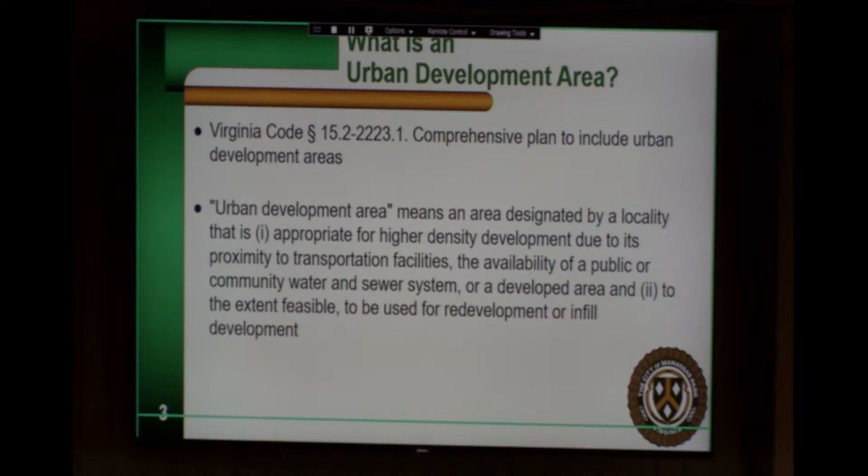What is an urban development area? The Code of Virginia, that code section 15.2, states that a comprehensive plan may include urban development areas. An urban development area per the state code is defined as an area designated by a locality that is, one, appropriate for higher density development due to its proximity to transportation facilities, the availability of public or community water and sewer system, or developed area, and two, to the extent feasible, to be used for redevelopment or infill development.

Any locality in the Commonwealth can incorporate a UDA in its comprehensive plan. It is not mandatory, it's optional. The boundaries must be identified in the comprehensive plan as well as on the future land use map. If adopted, it is required that the city move to re-examine the boundaries every 5 years and revise them as needed. It's also required that, if adopted, principles of traditional neighborhood design are incorporated in any urban development area, such as pedestrian-friendly road design, mixed-use development, and connectivity of road and pedestrian networks.

In Chapter 11 of the Comprehensive Plan, Land Use and Urban Design, this classifies all properties in different land use categories across the city. It also identifies the desired future land use of the city. The categories of land use within Manassas Park include commercial, recreation, public and utilities, private institution, single and multifamily residential. The future land use map is really the map for the next 20 years, and it shows the locations of these designations across the city.

There are 3 redevelopment districts within the city: the Connor Center District, the City Center Redevelopment District, and Four Corners. As you know, the chapter concludes with goals, objectives, and action strategies.

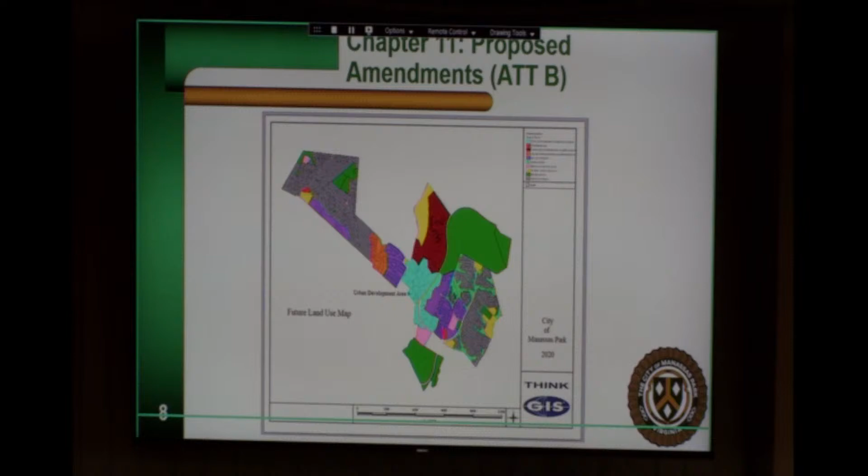Here you see the future land use map, the entirety of Manassas Park. As stated, different colors represent different land use designations. The light blue in the immediate center of the map depicts the City Center Redevelopment District. As you can see, we did not actually recreate the map. We added a text box indicating that that blue area would also be designated as an urban development area. And that was attachment B of your packet.

Attachment C of your packet also adds a text box to the inlay map of the City Center Redevelopment District, beneath it indicating urban development area, and this would meet the needs of the state code.

Also being proposed as amendments this evening, we have the Transportation and Mobility Chapter, Chapter 12 of the Comp Plan. This chapter looks at existing transportation alternatives and systems within the city, both from a motorized and non-motorized perspective. Various sections include streets and highways, multimodal solutions, and a small area focus, again concluding with goals, objectives, and action strategies.

The proposed amendments to the Transportation and Mobility Chapter, this is attachment D, page 10 of the chapter. This is the text: In addition, the city's designation of the City Center Redevelopment District as an urban development area will allow for increased opportunities to promote transportation-efficient land use and land development patterns to help reduce the impact of growth on the transportation network. The UDA encourages walkable, bikeable, and mixed-use places to attract development and spur local economic growth.

Again, attachment D, 3 new action strategies we're proposing in the Transportation and Mobility Chapter. Action strategy T1.3.4: seek funding from the Virginia Office of Intermodal Planning and Investment, OIPI, their Growth and Accessibility Planning Technical Assistance Program, to conduct multimodal planning within existing or planned UDAs or growth areas. Action strategy

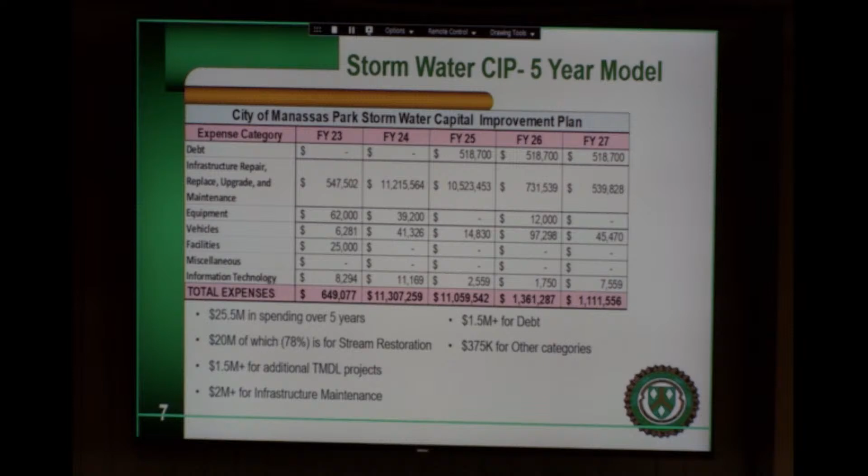We're hoping to figure out ways to conduct the stream restoration at a much lower cost. Again, we are in talks with vendors, and there may be a change coming for that stream restoration project in terms of location and cost as well. But until we get that, I really don't want to talk about it without being 100% certain. But we are hoping to bring that number down.

And that's what we're going to go over tonight, so you can kind of get a project by project overview. But again, if you look at last year's and you see a $13 million increase, it's all from transportation, and you'll see that when we go over the transportation items. And a lot of those are kind of aggressive planning projects that we're going to assume we get grant funding for, and if we don't get grant funding for it, unfortunately we can't do it, but we want to be pretty aggressive in forecasting that out.

Good. Okay, so now we'll go into the projects by detail. We'll start kind of with overhead for the city, administration, IT, and general services. We'll quickly move to the registrar. There's no updates from last year, so we can pretty much move on very quickly from that slide, and then we'll turn it over to schools to start briefing the departmental section.

So starting it off with admin and IT, I will turn it over to Chris, if you can hear us.

All right, thank you. So just to also kind of iterate a little bit what Laszlo previously talked about, a lot of our initial plan was to bake in the ERP, and a lot of that has been itemized out and moved over to ARPA funding. So what that does is create a leftover list of functionalities that we're looking at in terms of addressing needs for streamlining administrative processes in the city, but also note that some of these functions could also move into the future ERP. It's just we're not 100% certain whether that will be included in the new ERP. So we're leaving it here as kind of a plan B if it's not part of that overall solution.

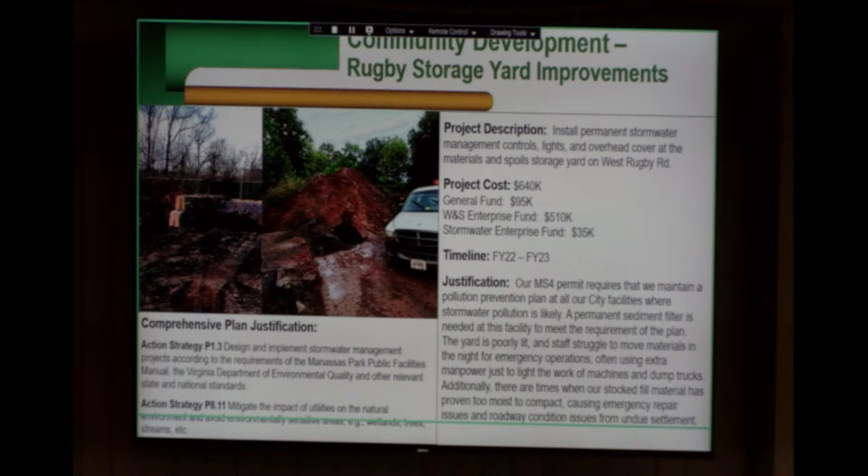When they were spraying down the roof, no water was coming in. As soon as they moved up to the parapet walls and the exterior walls, water started coming in a visible manner. So we're waiting on that final report to put forth recommendations, but we're keeping $150,000 in as a placeholder. We do know that one portion of those leak repairs is going to be replacement and reflashing of the top parapet wall where there's precast concrete. In line with our suspicions, it's not per the detail in the plan, and it's clear that water's been infiltrating through that parapet wall for some time.

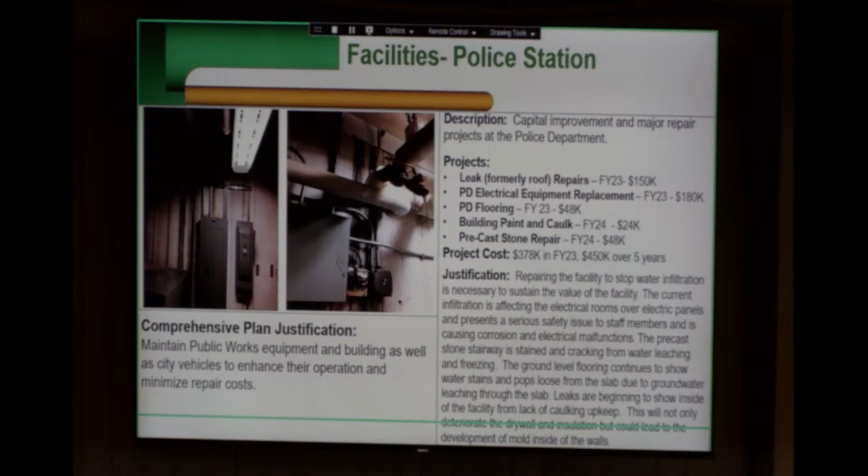Here's some images of some of the water infiltration. You see that black stain on the walls behind some of the piping. Here is some of the precast stone that's a mixture of cast-in-place stone and precast stone. You can see how it's become damaged, with rust spots forming around the handrails, and in some places rust spots in the middle of the precast stone.

Here's an example of the flooring, where it clearly has signs of moisture and the tiles popping up. This next project is the same basic layout - facilities at the fire station. The slide is laid out a little differently.

There were 4 more projects, so we put them on a second slide. I'll capture the highlights of this slide, and we'll move on to the itemized projects. Altogether, project cost for FY23 is $55.3 thousand,

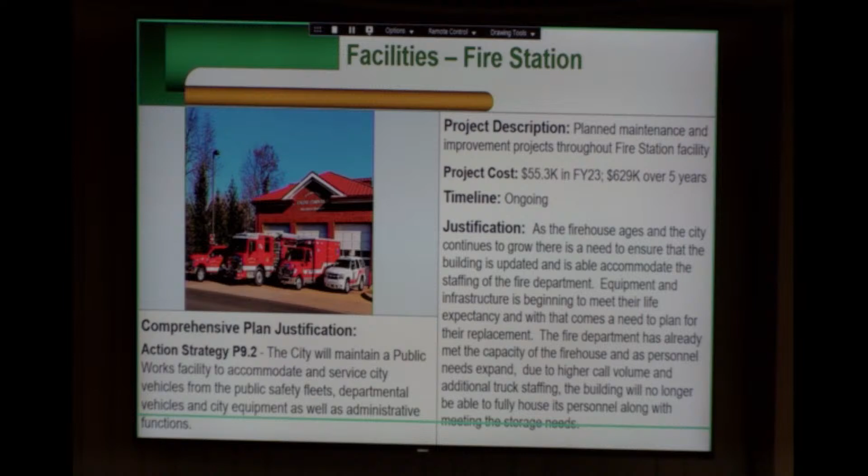$629,000 over 5 years. The projects include interior painting. We are going to attempt to move interior painting to an operational line where we do a substantial amount of painting each year, but stay below the $5,000 CIP threshold, so that regular painting of these facilities doesn't lead to massive projects like this.

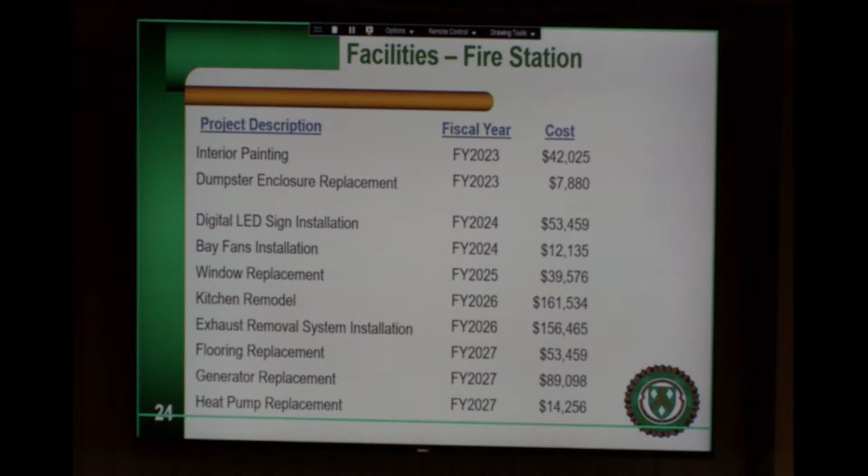Facilities, the building automation system, this has been an ongoing project. We've been trying to get rid of proprietary software that controls HVAC systems in our buildings. That's been a real focus of the facilities manager since he came on board. When we have the new city hall up, that would be the final step in this project, so the facilities manager can see what's going on at all buildings from a single laptop as long as he's logged into the network. This system can tie into not only HVAC but also security controls and any intelligent lighting systems, so those things can be monitored remotely as well, all from one comprehensive system. The total project cost is $125,000, and we're scheduling it at FY '25 after the occupation of the new city hall building.

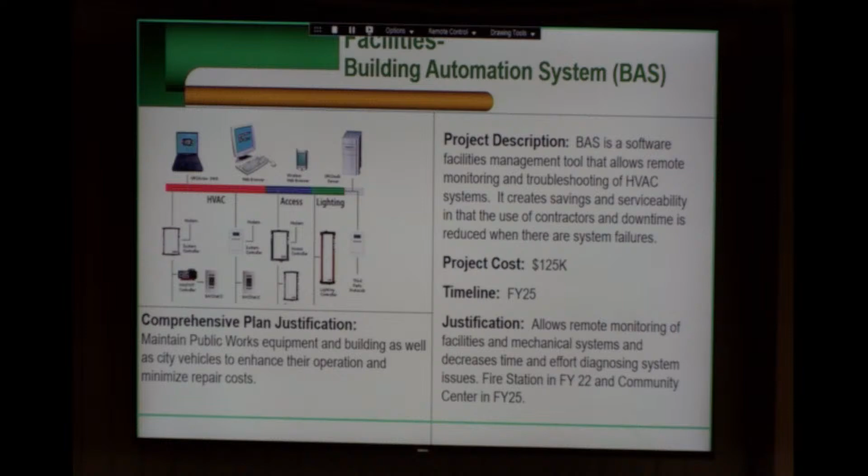Public parking lots. This deals with both the surfacing of the lots and the lighting of the lots. We have a rough estimate based on our internal city engineers' estimates of paving costs. We've tried to do the resurfacing at an average of $100,000 a year. This is comprehensive to all city-owned facilities, so your parks, Signal Hill Park, Blooms Park, we'll look at as that pavement ages, but also your community center, your PD, your fire department, city hall, Public Works. Fortunately, City Hall and Public Works, we're trying to replace those facilities as we speak, so those are not priorities right now.

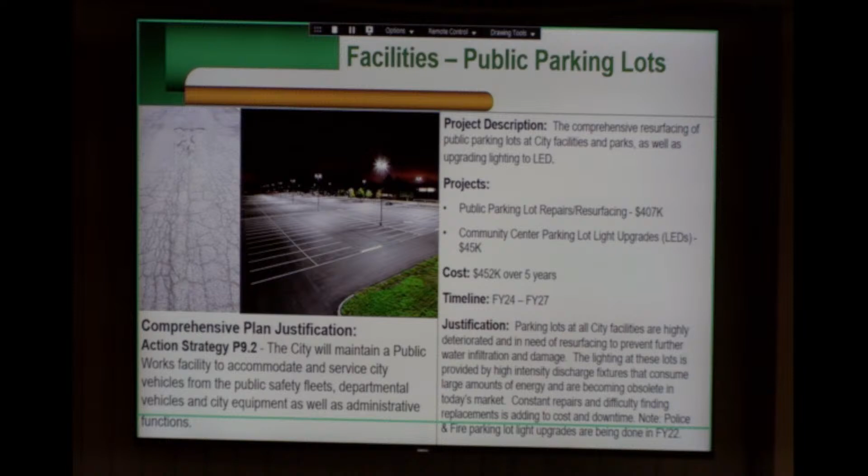And the LED lighting upgrades, we've actually made good progress towards upgrading a lot of the parking lot lighting at the police station. We're going to try to finish up the fire station this year as well, but upgrading the community center is a very large project, and that's $45,000. Total cost for all of this resurfacing, again trying to stick to $100,000 a year in lot resurfacing activities, is $452,000 over 5 years. And I know the timeline only goes out to '27, but understandably parking lot resurfacing will not end in '27. This will be beyond this CIP. Right now, this is based on city engineers' estimates, what we think a decent plan of resurfacing looks like.

For the actual resurfacing operations at Costello Park, there's some areas that are in really bad shape, and we don't want to wind up losing any base. That's a relatively new parking lot, and we want to try to get that resurfaced and stop water infiltration while we can. There's also some sidewalks around that facility that are in dire need of repair, and then moving on to the primary lot of the community center at Costello Park.

As far as the parking lot upgrades, again, police and fire, we hope to have those completed in FY '22, and then we'll move on to the community center in FY '24. And Public Works, we had it in there, but if we're in a new facility, we'll have to reevaluate when we move.

Excellent, thank you Calvin. And in terms of the previous slide, for the fire station parking lot, that's being handled under the ARPA funding, so their facility qualified for ARPA funding for improvements because they're technically a medical facility as well. So we didn't leave the fire department out of this project in terms of repairs and resurfacing.

For this project, New City Hall, New Community Development, this will stick around probably for the next few years on the slide deck, and hopefully we'll be done with it. But what this entails is two major projects. Number one, the City Hall, as you can see across the street, that's currently under construction, should be done this summer, and we'll move over to New City Hall and tear down this building.

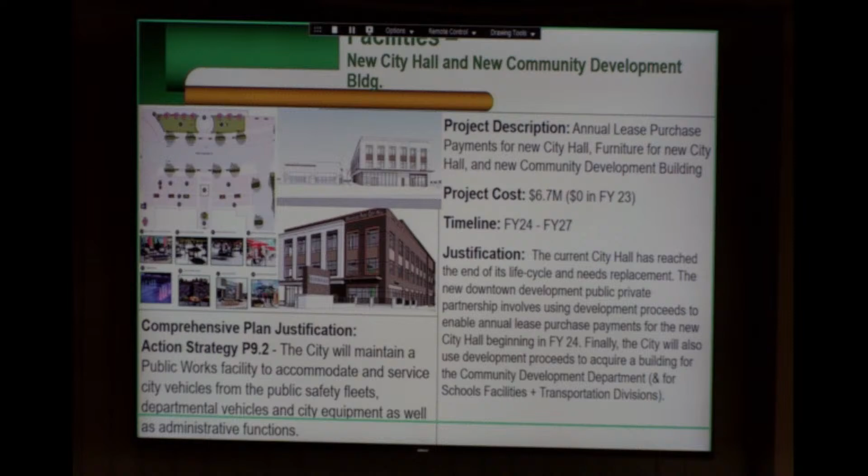The next project is the security system replacement and upgrade project. This was approved via the governing body via contract back in September, so there's already contracted work, but again, more for informational purposes since it's scheduled out for the next few years. The payments for this will have begun in FY22, and we make annual payments of $305,000 each year for the next 3 years, so 22, 23, and 24. The majority of the work should get done by 2022, but we entered into a finance agreement to be able to pay for it across those 3 years and not impact our current FY22 budget.

So what this project entails is whenever you come in, if you guys use your ID cards to swipe in, that's a security system we have. The vendor who is doing that was coming back with a lot of higher prices, and all these were getting very old. It was time to replace them anyways across our facilities. The fire station didn't even have any card reader access right now. Everything was a combination, so it was very old. Our new city hall needed those, so we're replacing all of them across the city with a more modern solution.

We're installing security cameras. Most of our facilities don't have any security cameras, and the ones at the police station are getting older. We have to upgrade them with new security cameras, safe alarm systems for our treasurer, panic buttons for our employees who are dealing with customers, with all the active shooter incidences occurring across the country. We want to equip our staff with the ability to notify police immediately. So that's what this project entails. It's already been approved, but we keep presenting it for appropriations and budget planning reasons, and the project is not done yet, so I want to keep this on your radar.

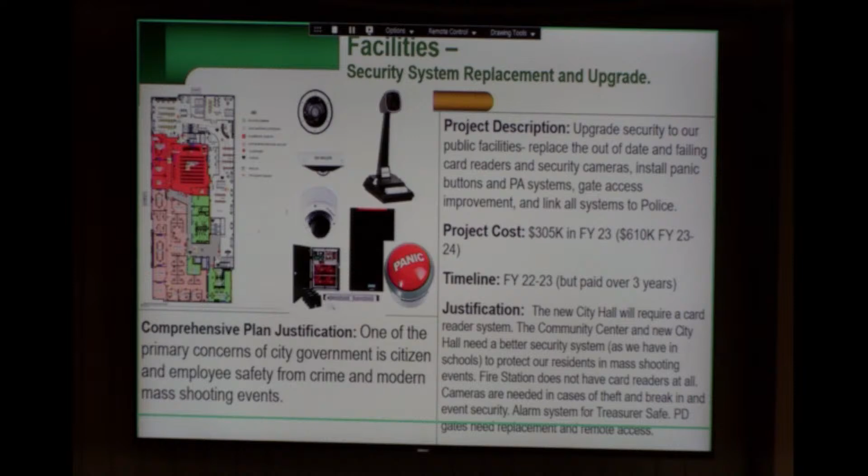And next we'll move to our fleet replacement program, so I will turn it over back to Chris.

All right, we'll start with the 10-year plan, because this is part of a much broader plan and 10-year ongoing strategy for the city. Just to quickly review, this was the FY21 phase decision to move to an enterprise lease model for the city in terms of replacement vehicles, that we really only started due to delaying things for the COVID pause. FY22 was the first year we really started replacing the bulk majority of our vehicles, which we're doing right now as a city. So this is just the continued plan to execute.

I just wanted to note a few caveats. Obviously people have brought up the understanding that logistics and supply chains have been a bit bottlenecked. We still have a really solid agreement with Enterprise to find and procure government rate vehicles, so we haven't really seen any increase in pricing from the original forecast, but there has been some slight uptick in the public safety upfitting material costs. All of those components go into mostly police and fire rescue vehicles. So we did see a little bit of that, but that's on the upfit side, not necessarily with Enterprise, though we do bake that material component into the lease price.

Also of note, the value of used vehicles is also going up. So the net fallout is still kind of a break-even in terms of the offsetting cost there, just because the equity value of our current vehicles that we're selling back to Enterprise is also going up, because used vehicles are more valuable due to the lack of brand new vehicles and the cost of them going up. So we still compared it to the old model prior to the Enterprise program, and we're still at a net savings of just over $900,000. So, next slide.

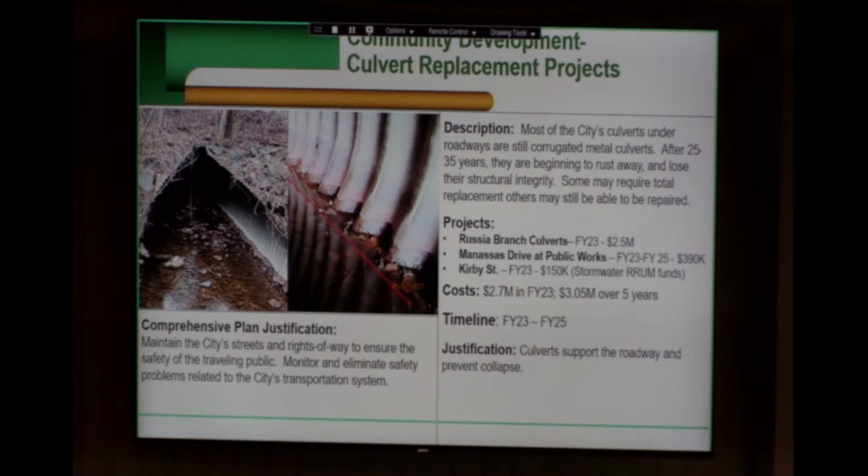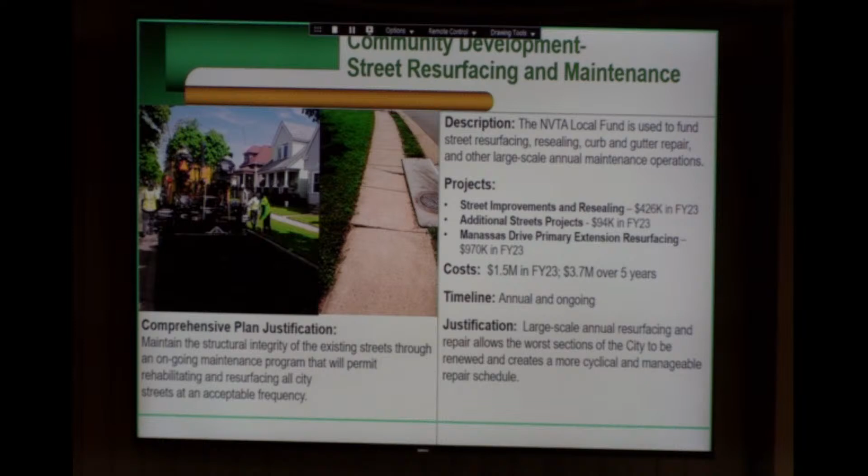So every 5 years, Steve, we have an opportunity to apply for this grant, so it is somewhat ongoing. Total cost for all of these resurfacing and maintenance operations is $1.5 million in FY '23, $3.7 million over 5 years.

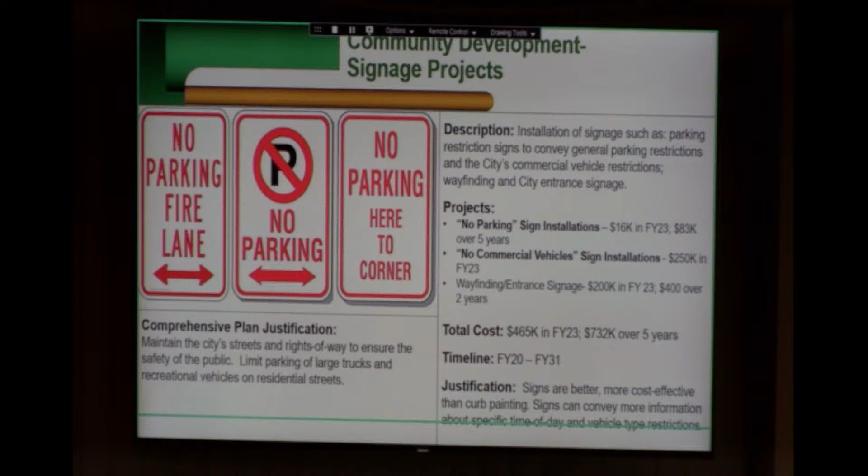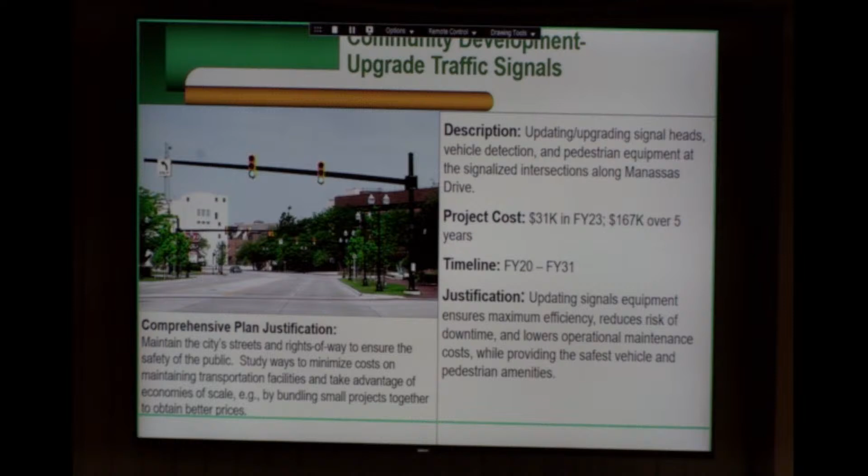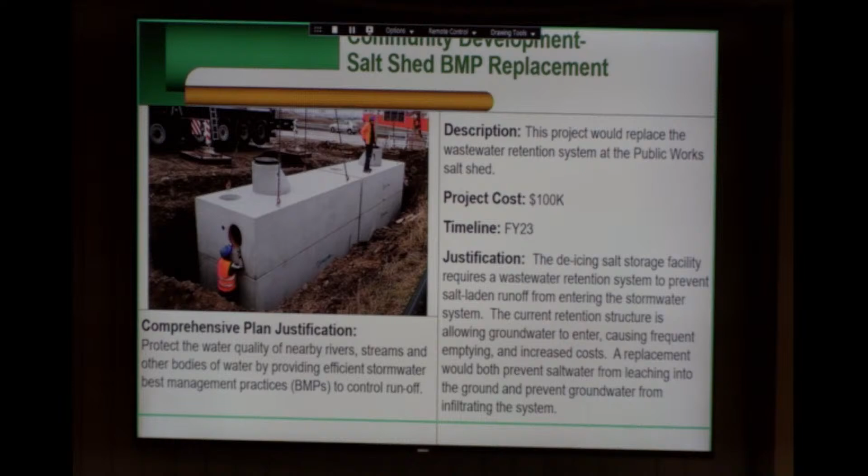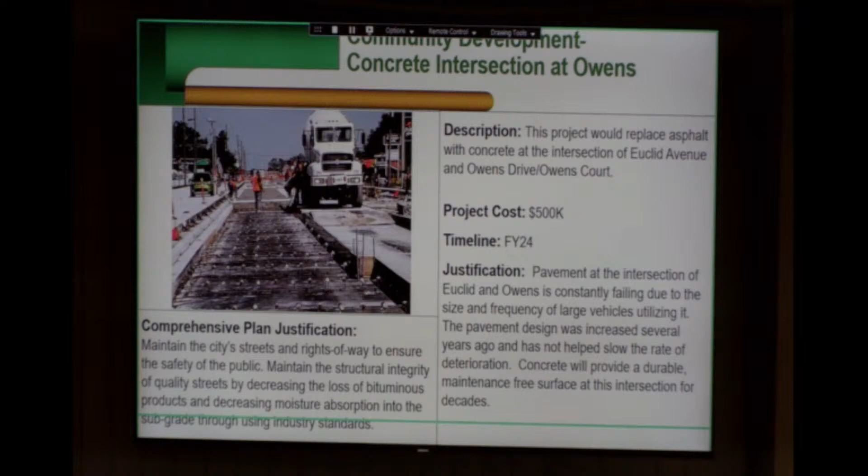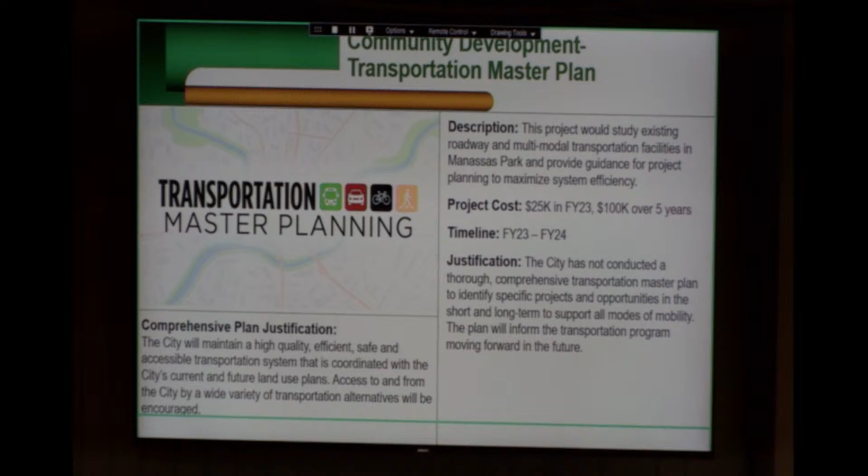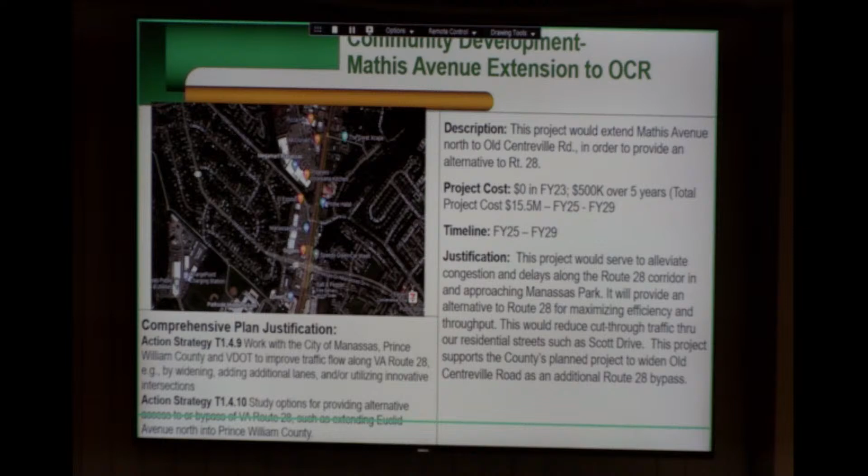So you're really restricting side street traffic coming onto 28, the way they come onto 28, to leave more open signal time for the northern movement.

It's a major safety project, which is what we learned from the STARS study that VDOT conducted. You have a lot of accidents on Route 28 when people are turning in and out of all these various shopping centers and driveway entrances. These R-cut, L-cut, and median U-turn intersections help cure some of that, and they also improve travel time.

down the corridor. We're looking to add aspects to the project that will help it score higher in Smart Scale — anything that involves multimodal transportation, bus depot, park and ride lots, things like that. Any of those things improve how this scores in Smart Scale, but we're going to continue to pursue funding for this project. We know that this is far out.

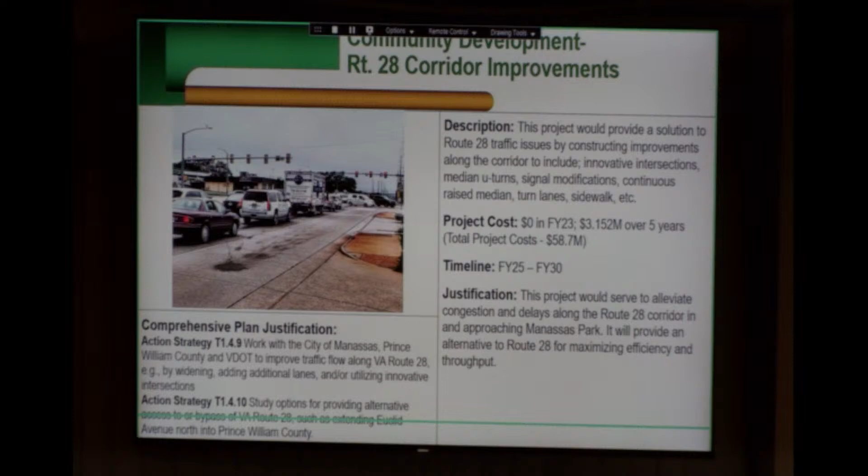reconnect — I understand that at one time a gravel road did actually connect Euclid Avenue to Route 28, but ever since the residential subdivision was built, that road has been blocked at the edge of the subdivision. This would fully pave and provide parking on both sides of Conner Drive through that area, allowing better access from Route 28 into our downtown and from downtown to Route 28.

This will also help serve the businesses between Conner Drive and Manassas Drive, because if any of you have tried to go to the U-Haul or the gas station on the corner, you don't have a lot of choices — you either make a U-turn somewhere down on 28, or drive all the way down to Liberia and come back. So those businesses should benefit from this project, and especially the residents of this subdivision will have much better access to the businesses right there on the corner.

But this project is $2.7 million in total, with $2.3 million in FY22 through 23, and we do anticipate it will be completed with construction hopefully this fall.

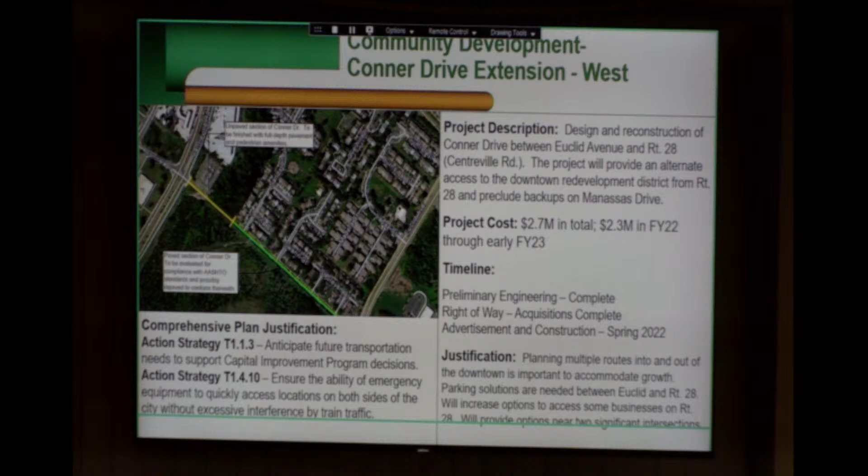Conner Drive Extension South. This one is probably new to everyone here, but we have seen iterations of this when we were looking to relocate the parking garage, the BRE parking garage, from the base tract. We had several developers come in with certain proposals. I believe one of those proposals that was shown to the Planning Commission and the governing body had a bridge or tunnel extending Conner Drive to the lot in front of the Elms.

Right now, when the railroad arms come down - Norfolk Southern says there's no problem, but we all know there's a problem - traffic backs up, and it can take 45 minutes for me to get home to Blooms, because you've got to go to Liberia. Well, our emergency responders have to go through the same thing. So a second way to traverse the tracks that is not an at-grade crossing subject to railroad arms, or God forbid, some sort of major catastrophe on the tracks. If our emergency access vehicles had a bridge or tunnel they could go under or over the tracks, that would definitely improve our safety here in the city.

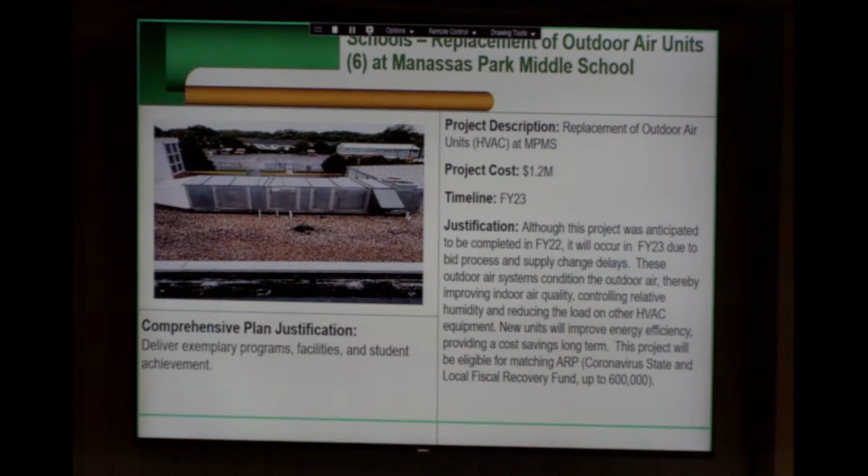So, Chief Lugo, are you on? Yes, sir. Can you hear me? Yes. Thanks. Good evening, everyone.

That made it kind of hard for our dispatchers to do their job. But this vehicle will also provide the city public safety and any city operations the ability to use it for any disaster, criminal matter, or fire structure that's going to be a prolonged investigation, or having our people out there for a while. Or any big city events we held here, like National Night Out, 4th of July, any festivals we might do, where this would help keep our city safe during the event. We expect hopefully a timeline for FY25 to 29 on a lease purchase plan.

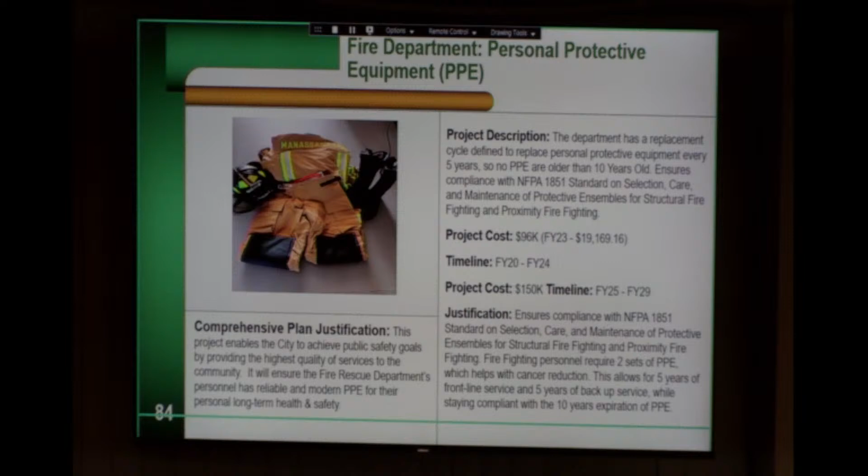Self-contained breathing apparatus is the same, replaced every 10 years for the safety of personnel. The next timeline coming up is fiscal year 25. The units we'll be replacing are from fiscal year 2015.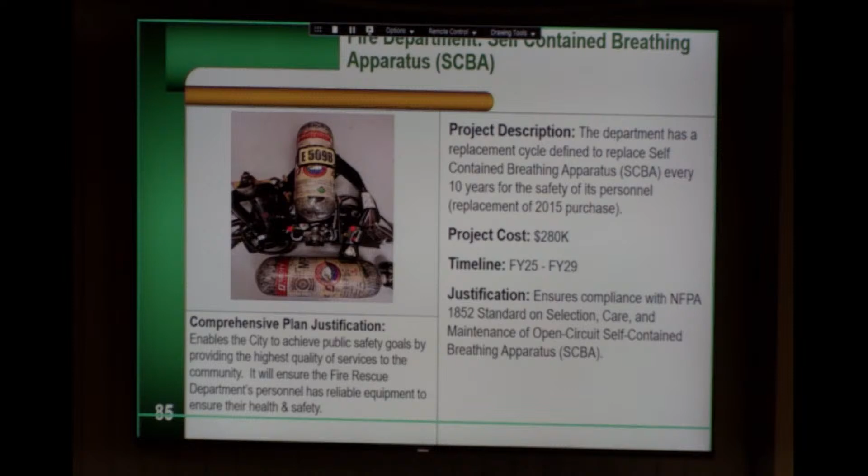And I think that is it. No, okay, one more slide — building renovation, and I'll let Mr. Palco jump in on this as well. He asked me to add this slide in there.

You can see it's fiscal year 31. The justification is that as the firehouse ages and the city works to meet the minimum staffing needs, the building needs to be updated to accommodate the staffing. This is us looking at the building and seeing that we are outgrowing it, or have outgrown it, and there is a need to plan to add bunk room, locker room, and that sort of thing.

With the current footprint on the land we have, there's no way to grow out, so there's more of a plan to grow upward, like a second and third floor. As you can see, the project cost is $10 million. This is just a heads up that this is coming up in fiscal year 31 with such a big number as a plan.

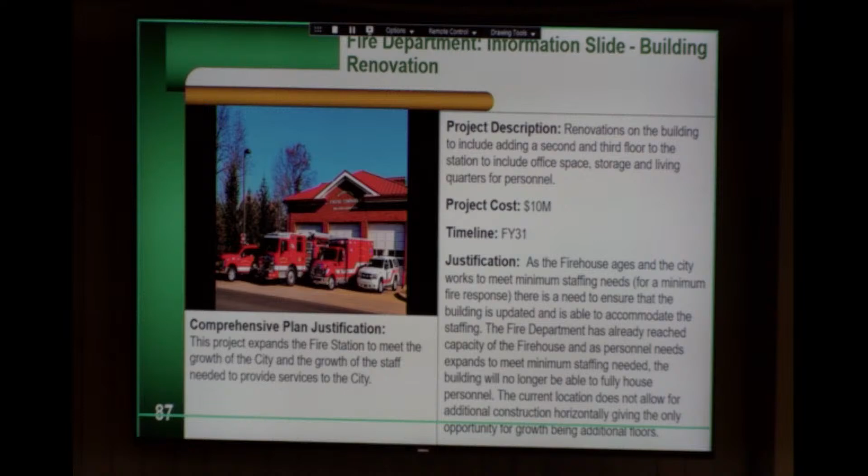Great, thank you. Any questions for Chief Jones? Okay, good. Great, thanks Adam. Okay, Jay? Yes, sir, can you hear me? Yes, sir.

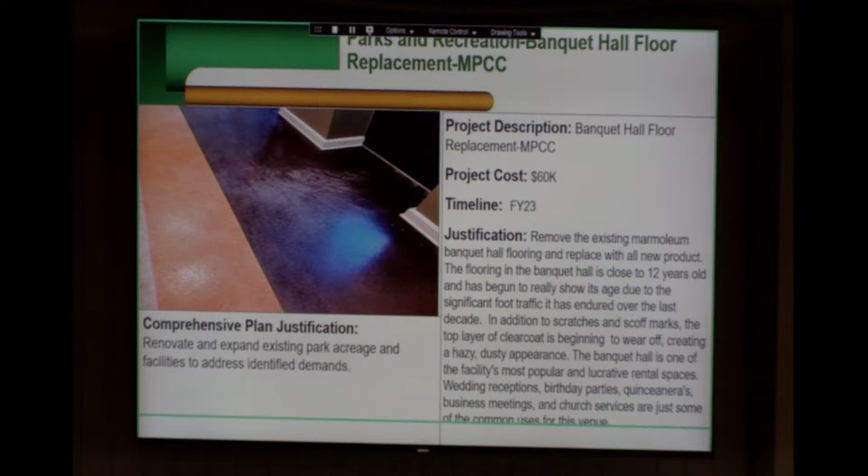So I think these furniture upgrades would enhance our ability to market each of those spaces more effectively.

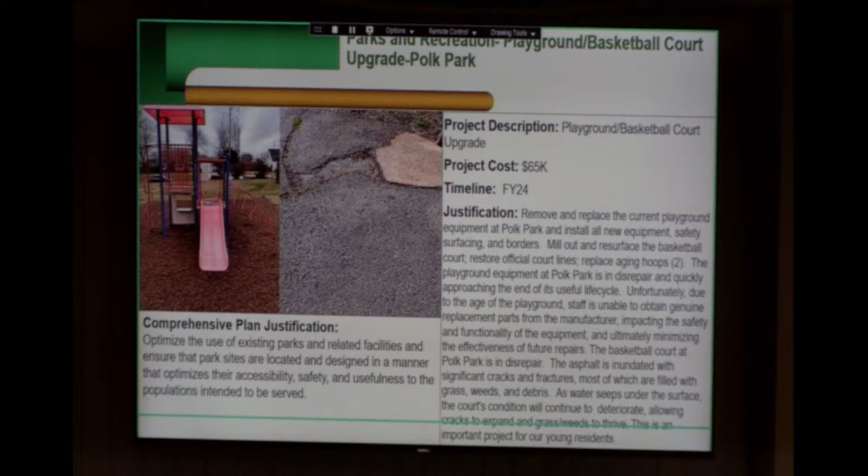This project comes in at $24,000 and is proposed for FY24. The current light bollards that border sections of the walking path around Costello Park, close to the community center, are very worn and distressed and in need of replacement.

4 of the bollards have been capped and removed due to issues we're unable to fix without completely replacing the unit. 6 more are structurally unsound and on the verge of being taken offline. Out of the 21 total, we've got about 10 already that are either offline or about to go offline.

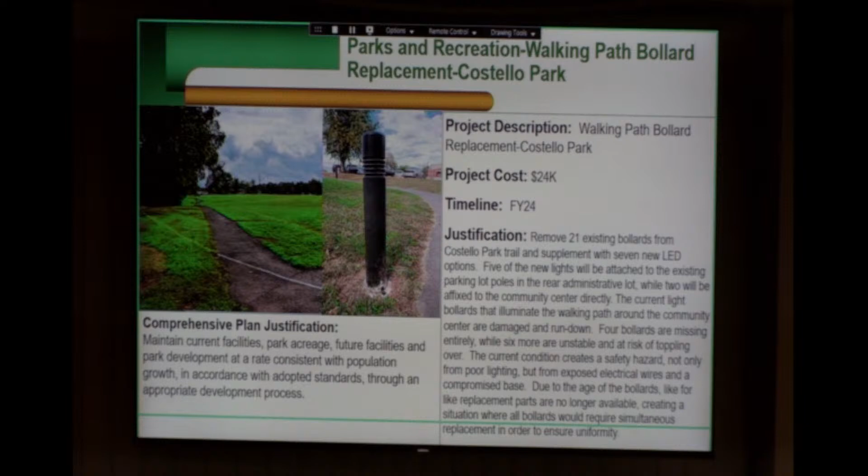Next projects are the perimeter caulk and white coat replacement projects. These come in at $26,000, $28,000, and $73,000 respectively. Those are 2 perimeter caulk projects in 24 and 29, and 1 white coat project in 24. The caulk line surrounding the activity pool and Lazy River needs to be removed and replaced.

This was last done in 2015, but it's recommended to be completed every 2 to 5 years. If this caulk line is compromised, we risk water seeping into the joints, which can ultimately cause beam and concrete damage.

Similarly, the Lazy River white coat will need to be removed and replaced in '24 as well. This was also last done in 2015. This type of work is recommended every 7 to 8 years. Again, along the same lines as the perimeter caulk project, we want to prevent water from reaching the joints.

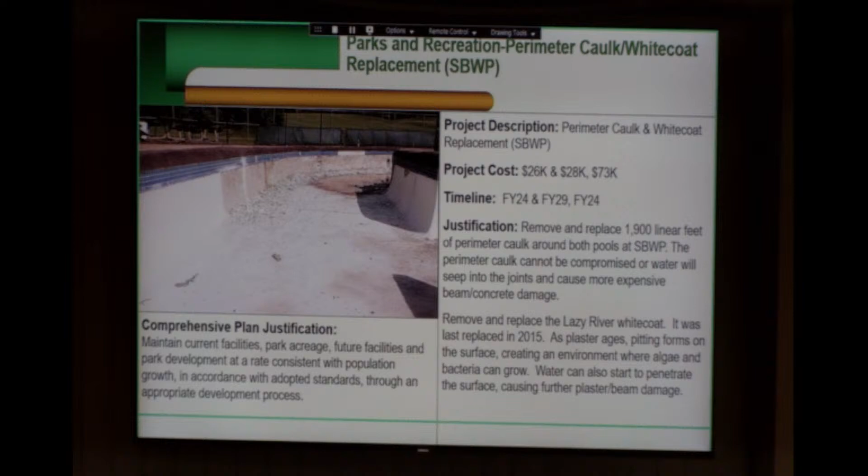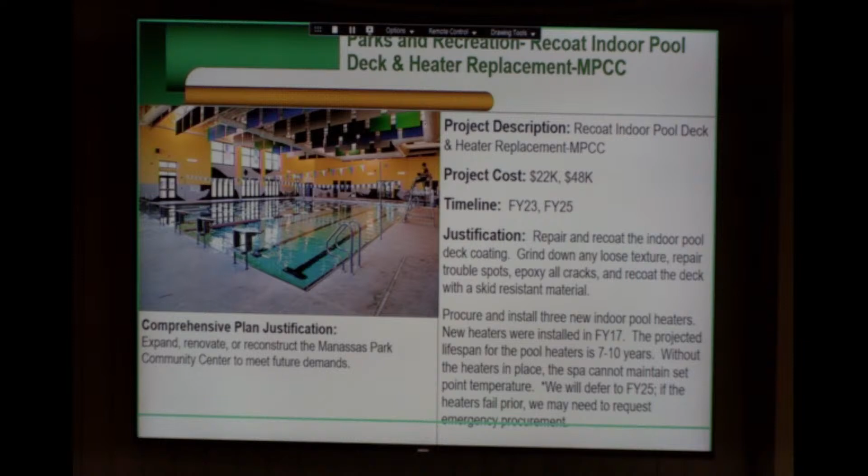Like last year, we mentioned if we're unable to make it to '25, we may request emergency procurement on this particular project. Next up is the outpost, spray cannon, and safety matting replacement projects.

These come in at $375,000, $40,000, and $25,000 respectively, and are proposed for FY25. After 26 years in operation, the outpost is beginning to really degrade and deteriorate. It's one of the water park's most popular and largest activity features, and really serves as the centerpiece of the facility. But after 2 decades of wear and tear and exposure to the elements, full replacement at this point is imminent and necessary.

Water cannons are also in dire need of replacement. We see frequent leaks and a lack of manual control. Essentially, there's a steady stream, whereas they're designed to allow the user to manually control the cannons. That feature no longer exists, and they're even prone to harboring bees' nests due to the antiquated design, which is certainly a safety risk. One of the 4 cannons has actually been permanently taken offline due to a more systemic pipe issue that would require us to demo a large section of the pool deck to fix that particular cannon.

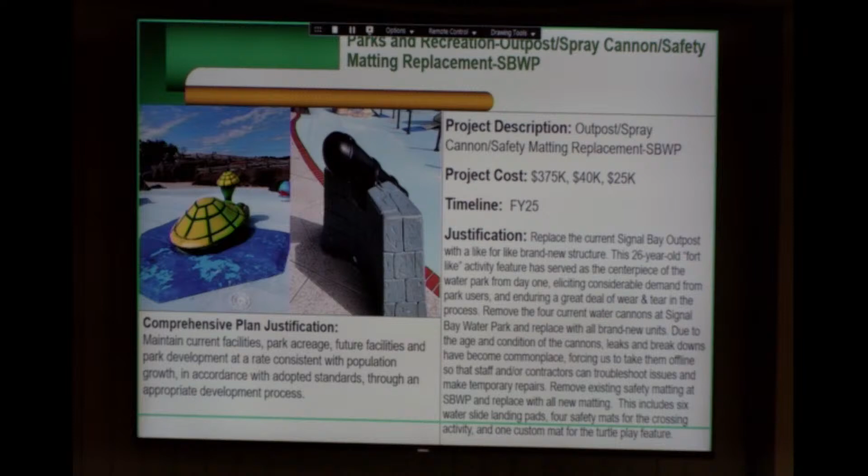Lastly, the safety matting throughout the activity pool needs to be removed and replaced. This includes 6 water slide landing pads, 4 crossing activity mats, and 1 custom mat—11 in total. After 15 years of exposure, the mats are discolored, the paint's chipping, cracks are beginning to form, and they're just in general disrepair.

Next project is the Signal Bay Water Park Bathhouse, Pump Room, and Pool Office Demo and Rebuild. This project comes in at $1.2 million and is proposed for FY25. The bathhouse, pump room, and pool office have really reached the end of their useful lifespan.

The bathhouse is not up to code or ADA compliant. Electrical components are failing. The cinder block walls are cracking. Ventilation is inadequate and unreliable. Oftentimes the roof has leaks. The pump room is outdated and dilapidated. So the current facility will need to be demoed and rebuilt in the current footprint.

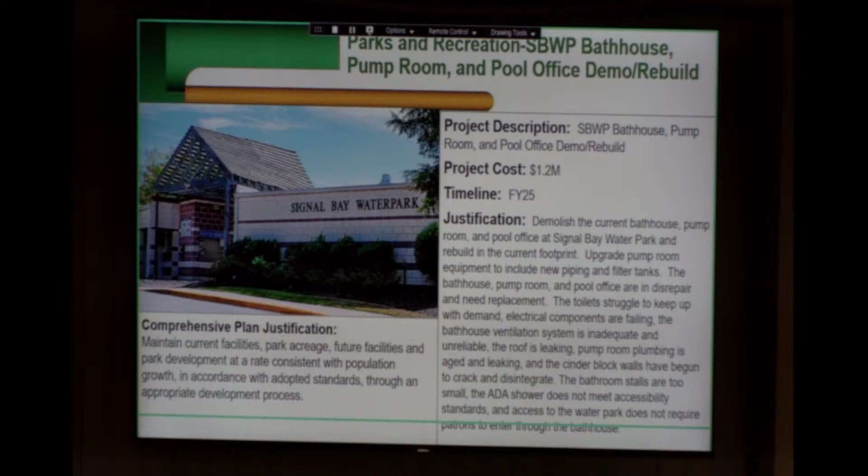Next project is the bus replacement. This comes in at $68,000 and is proposed for FY26. The bus is at the end of its useful life cycle. It's already endured significant repairs over the last 2 years, one of which was a transmission issue. The vehicle is predominantly used to support senior-based services and is our only ADA accessible vehicle in the fleet.

Next project is the zero-turn mower replacement. This project comes in at $14,000 in FY24 and $28,000 in FY25. The Parks Division maintains just under 80 acres of mowable space, so they rely heavily on these zero-turn mowers to manage significant mowing obligations at 6 parks throughout the city. By '24-'25 we're scheduled to hit industry standard for hours of operation on the 2 units, and we're looking to replace 1 unit in '24.

Basically, the unit in 24 was purchased a year prior to the 2 in 25, so that's why we're spacing those out. Next project is the Blooms Park Trail Restoration.

This comes in at $1 million and is proposed for FY26. The current trail at Blooms Park is in disrepair. There are large cracks and fractures throughout the trail. In some places, sections of asphalt are totally displaced and detached. The trail is inherently rugged and provides for a pretty challenging hike. But the frequent changes in grade and the deterioration will only further enhance the risk for trips and falls as we move forward.

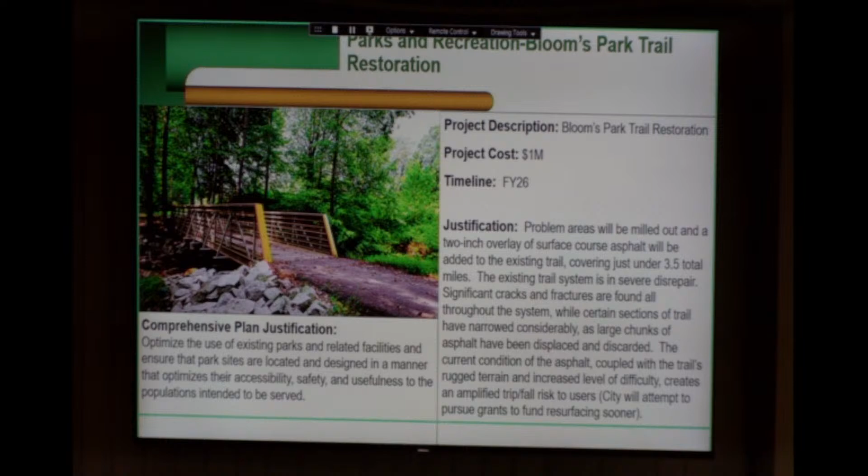In this project, we're looking to mill out and completely resurface approximately 5 miles of trail. Since we've recently expanded the trail system to include several shortcuts, this quote was modified from last year. We came in last year a little over $700,000, but again, that was based off of a little under 3.5 miles of asphalt trail.

Next project, and the final CIP project for Parks and Rec, is the downtown library establishment. This comes in at $425,000 and is proposed for next fiscal year. Over the next year, the library will transition from Blooms Park to a much larger, robust 8,000 square foot space in the city's new downtown. This project encompasses FFE, opening day collection, facility design, and technology costs associated with that move and setup. Basically, a combination of those 4 categories will make up that aggregate $425,000.

This was a 2-year CIP project, back to back, and currently in FY22, $400,000 has been earmarked to also address needs related to this project.

Any questions for Jay? I have a comment - I didn't see anything about skate parks. That's still in our spreadsheet. It's one of those desired projects that we have. It's a very expensive project. That's a real concern for me, so.

I think we'll continue to explore grant opportunities for that, but we understand there is some value to it. We weren't able to fit it in the last few years in our CIP. But I'll keep hammering on it. You guys can certainly push the governing body, and we'll keep it in the spreadsheet to keep awareness of the project - it is there, it is valued.

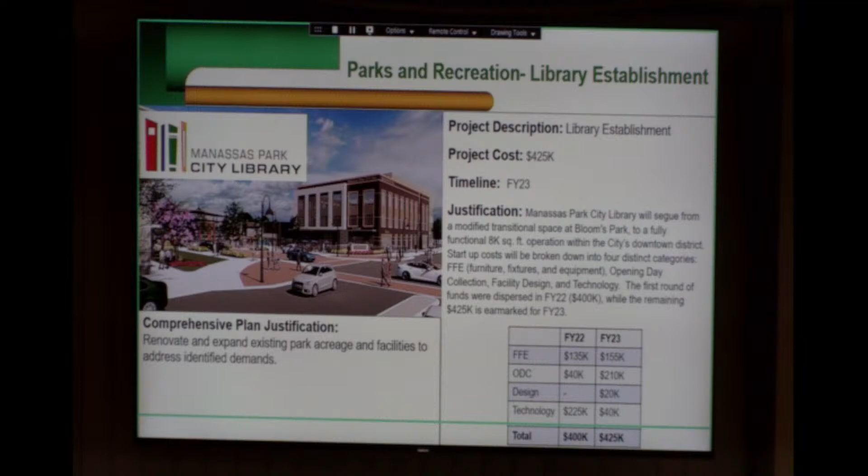We're going to look at the general fund projects, the community development fleet needs that fall outside of the enterprise lease program. Our community development and public works vehicles are ones that can't be obtained by enterprise because of their size or specialty types of equipment, but there's no cost in FY23.

These are very large vehicles, $863,000 over 5 years. One of the biggest expenditures in this category is we have 2 flusher trucks in the city. We are not allowed to use our stormwater flusher truck for sanitary sewer activities, or vice versa, unless there was some sort of sterilization procedure. We looked into that and it wasn't really feasible, so we have had 2 flusher trucks since.

The water sewer flusher truck is by far the oldest. The gun on it for hydro excavation is currently out of service - we broke that on a water break last week. That is why you see $479,000 out of the water sewer enterprise fund compared to $249,000 out of the general fund. Not a typical split for buying equipment, but that's because this large flusher truck is 100% out of water and sewer.

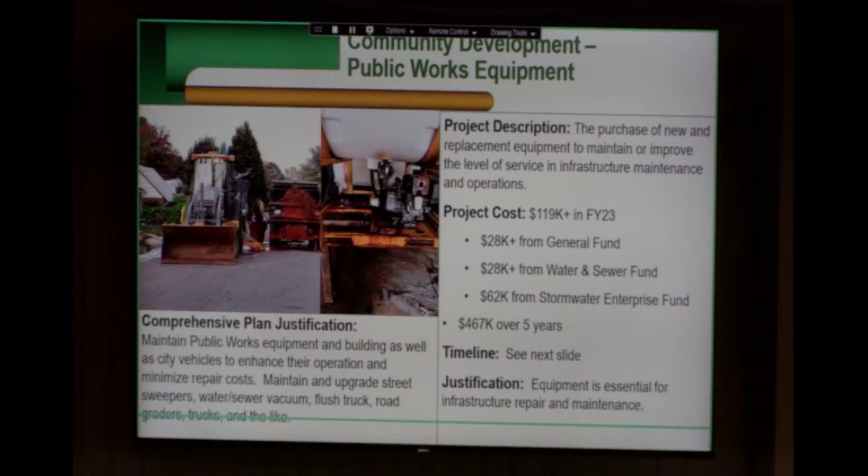The 12-inch chipper is one of those specialty pieces of equipment that is primarily out of the stormwater fund, because we primarily use chippers for pond maintenance, stormwater easement area maintenance, and taking down small to medium-sized trees.

A mini excavator - we have our old backhoe and a new backhoe, but a mini excavator, especially when dealing on private property, maintenance of laterals and things like that, allows us to be less disruptive. It tows easier, is easier to load, allows for less damage, and smaller excavation areas.

So we've never had a mini X in Public Works before, but it's been on our list of needed equipment for about 5-6 years. So we're happy to finally see it coming on board in FY23 at $69,000.

Our rubber tire loader, that's just a direct replacement. Our existing rubber tire loader is aging and we keep having hydraulics issues on it. It's time to replace it.

3 light towers, again, another piece of equipment that we have gotten amazing life out of. I think we decided in a CIP meeting this year that the light towers we have are over 15 years old. We've gotten great life out of them, and we're going to try to extend them to 2026, but both the mechanic and the superintendent are begging me right now to try to advance this schedule, because we're having issues with the motors on the light towers. They're gasoline motors, so they're both a generator and a light tower all in one.

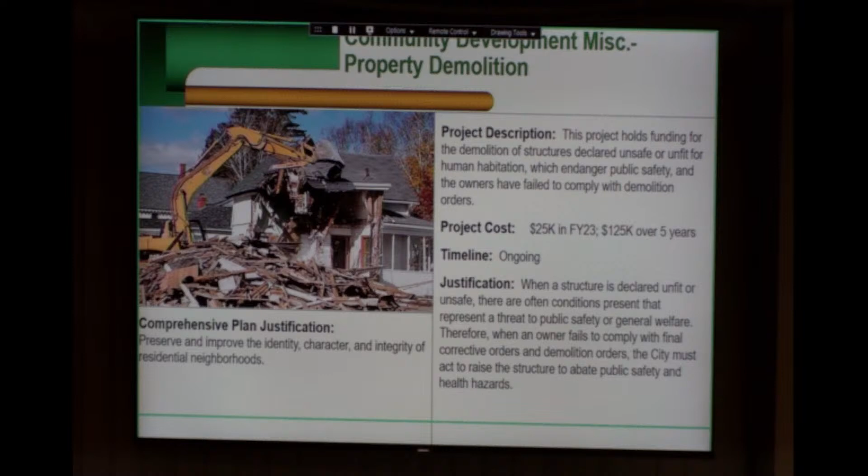If you drive down a hill, you're probably finding a private sewage lift station. Many of the businesses in the Conner Center have private sewage lift stations, which means the owner of the business is responsible for maintaining a sewage pumping system that pumps uphill to a main.

They're not usually familiar with it. We see a lot of properties change hands. We've had some major spills because people see water flowing up out of a pit, and then they put a sump pump down in it and pump. One time they were pumping it right into a storm pond. So we don't feel very comfortable.

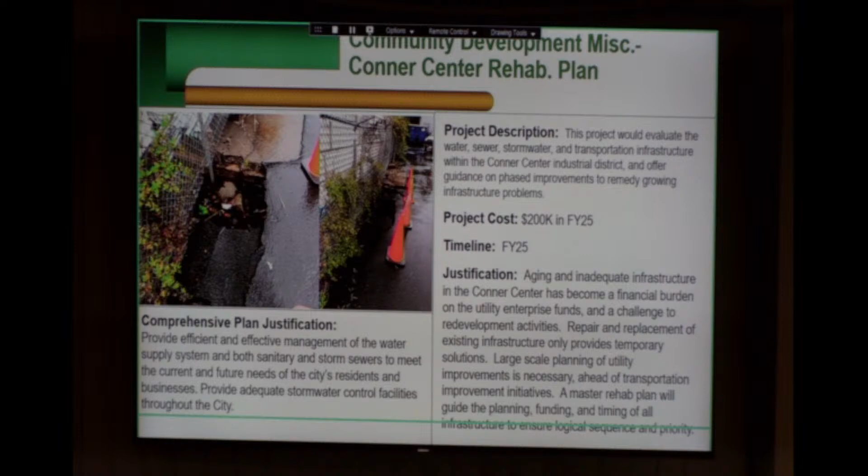$200,000 in FY25. That's our best estimate to get an actual master utility rehabilitation plan for the Conner Center. These are Water Sewer Enterprise Fund projects that are primarily funded out of the Water Sewer Enterprise Fund.

This is the annual ongoing RRUM line: repairs, replacements, upgrades, and maintenance. It's where we carry a very large figure for things such as lift station pump failures, force main ruptures, valve replacements in force mains, things that are going to cost immediately because of the nature of the beast. They're going to cost over $10,000 a pop.

This would cover generator failures at your pump stations and lift stations. This would cover major electrical equipment outages, failures at your pump stations and lift stations, major piping and valve repairs in the streets, especially with our 20-inch mains, large-sized water mains that can cause catastrophic damage if they're not mitigated as quickly as possible.

$840,000 in FY23, $3 million over 5 years. We typically don't spend all of the money because we don't have as many emergencies, but we have to have money set aside for these emergencies when they pop up. But some years, this coming year, we have major water tank renovations, things that we need to do to our water tanks to renovate them, get them cleaned and painted.

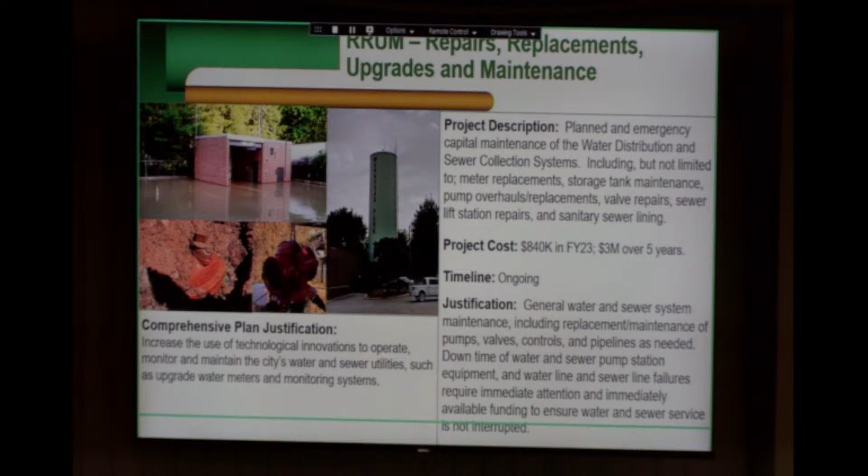So we'll see some significant expenditures in FY23 out of this line for sure. Community development gravel easement roads. We have a lot of sanitary sewer, water, and stormwater easements throughout the city that run back behind properties through wooded areas. None of these areas were provided with gravel easement roads. I don't know how many of you are familiar with the UOSA Force Main that runs up next to the Mosby subdivisions. But that's the kind of thing we're talking about, a gravel access road where it doesn't become grown up with vegetation, so that you always have the proper width to get vehicles in and out for maintenance operations.

So you can get flusher trucks in there, you can get hydro excavators in there, you can get large equipment in there. This project would be intended to provide gravel easement roads wherever we need them to access our utilities that are off the beaten path. This project cost is estimated $600,000, $400,000 from the water and sewer fund, and $200,000 from the stormwater fund, and we're looking to do this in FY26.

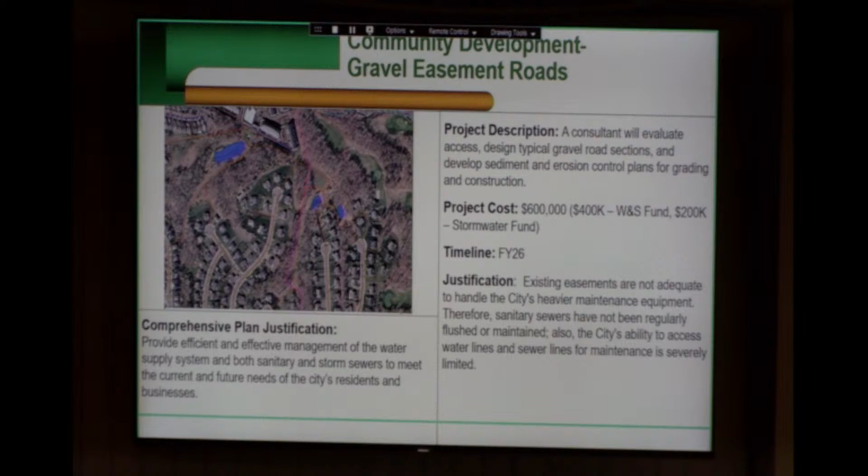Phased water system improvements. Phase 5 was some new meter vaults in the city of Manassas and some new lines under the streets to distribute that water from Stonewall Park, meter vault there, and one next to the Public Works building in Manassas. Phase 6, 7, and 8 are all focused on high break rate areas on the west end of town where the cast piping is now 70 years old plus. We have substantial break rates in certain areas. So phases 6, 7, and 8 look at those high break rate areas and schedule full-on water delivery system replacement projects through there.

Phases 9 and 10, we are reserving for potential upgrades related to either development or related to potential capacity negotiations, because we are about to enter into a phase where our capacity agreements will need to be relooked at, and depending on what arrangements we can make with our neighbors, we want to have the ability to make pump station improvements or construct new pump stations to best utilize the money towards the proper capacity agreement.

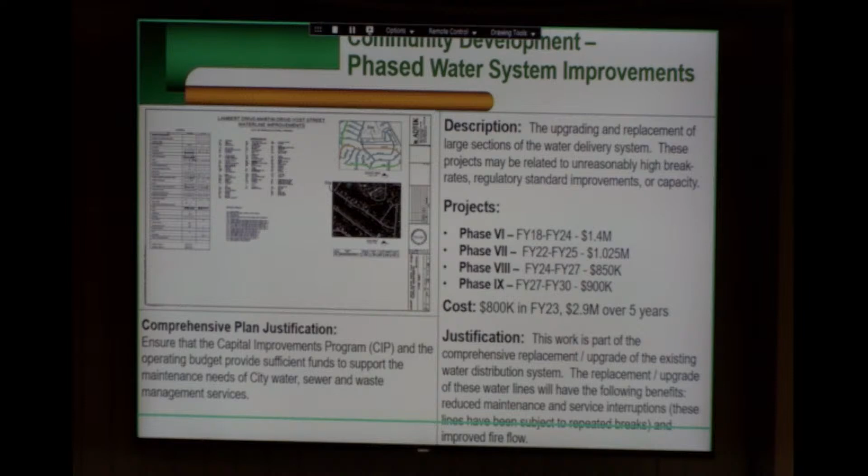Off the top of my head, I believe Phase 7 deals with Manassas Drive between Cabell and Denver, but don't quote me on that, I'm just going by memory. Phase 6, 7, and 8 all involve removal of aging cast iron piping with high break rates.

The SCADA system project - we had a SCADA system installed in the city around 2010. There was a significant error by the design engineers that left us with a newly installed radio system that did not communicate. We spent time in litigation over that incident, with all three parties - the designer, the contractor who built the project, and the city - in potential litigation with each other. It took a long time to finalize the blame and assign it to the appropriate party.

But the SCADA system turned out to be a proprietary system. The company that designed it has since dissolved, so even though we negotiated a software support agreement after the litigation, it doesn't do us any good when the company doesn't exist. Our SCADA system is slowly turning into a very buzzy, loud paperweight because there's no one to maintain the software or the program. So in FY25, we're looking to spend $1 million toward replacing the existing SCADA system.

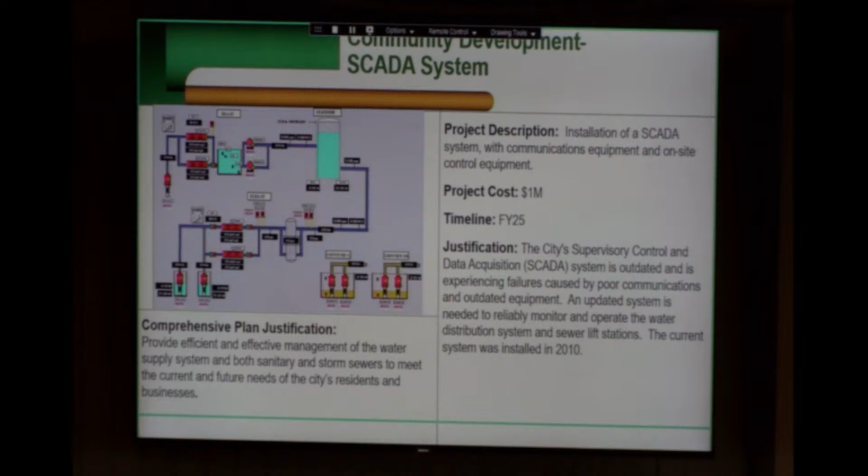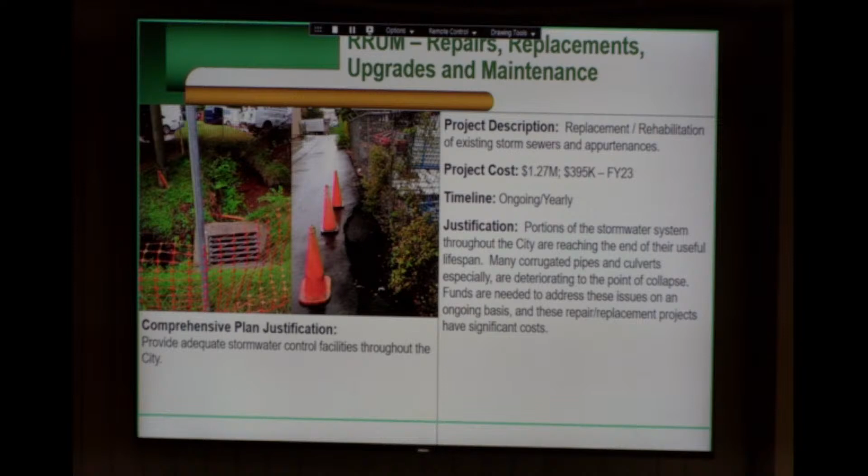Stormwater Enterprise Fund projects - again, these are projects where funding primarily comes from the Stormwater Enterprise Fund. This fund also has a RRUM line for major repairs, replacement, upgrades, and maintenance, costing $1.27 million over 5 years, with $395,000 in FY23. This is an ongoing yearly line item in the CIP.

Conner Center maintenance projects - these are projects we already know about, primarily collapsing galvanized corrugated metal pipe. These pictures represent an issue that has been fixed; we finished that project this year, but there are many more like it throughout the Conner Center, where sinkholes are developing and people are losing portions of their parking lots due to our corrugated metal conveyance system.

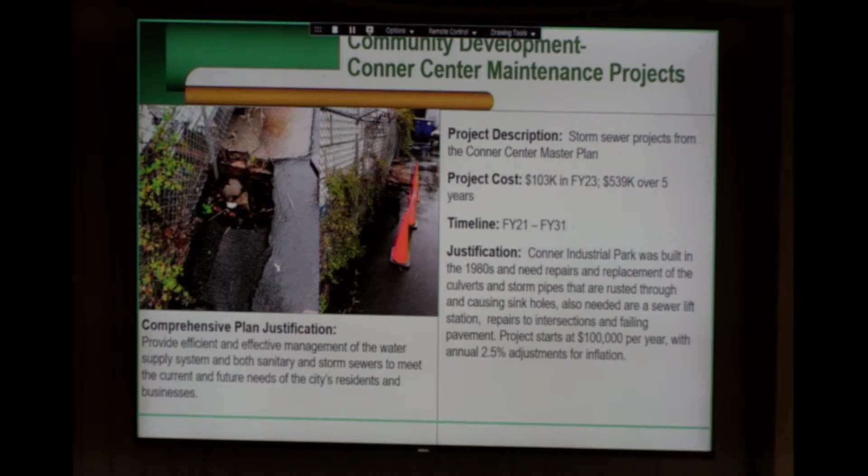$103,000 for this series of projects in FY23, and $539,000 over 5 years.

TMDL reduction projects stem from the Chesapeake Bay Act, mandated by EPA, handed down to state DEQ, and then trickle down to all MS4 permit holders in Virginia. TMDL is the total maximum daily load of phosphorus, nitrogen, and suspended solids we can contribute to the stream. These projects are geared toward reducing what we currently put into the streams from our municipal bounds.

Conner Center Pond 1 retrofit is an already designed project for which we have SLAF grant money. We've delayed it because development in this drainage area drains back into Pond 1, so until that area is stabilized, we don't want to make massive improvements to Pond 1. But Pond 1 got us to our 5% first round TMDL reduction requirement.

We're looking at Russia Branch stream restoration as a potential way to get a significant portion of the remaining reductions. Our next reduction target is 40% of our TMDL, due in 2023 or 2024 - I believe 2023 - and then 2028 is the last round, requiring 90% reductions.

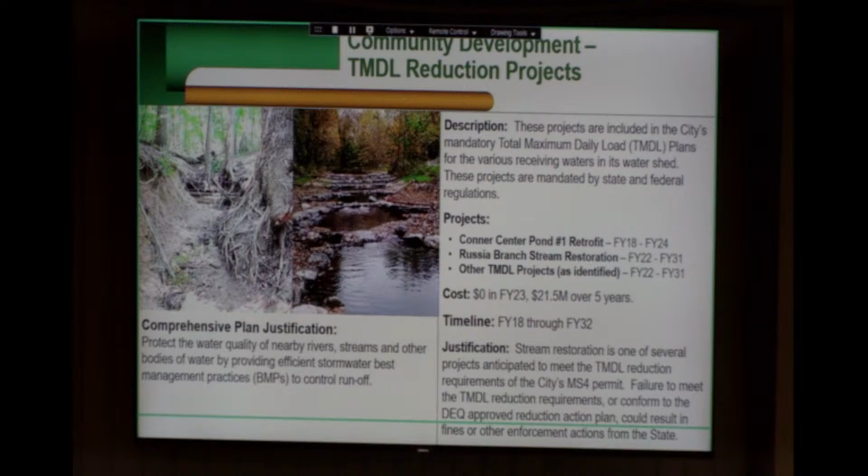BMP pond evaluation, this is another DEQ mandate. This is going to start being a requirement of our MS4 permit to actually have surveyed plans of all of our city-owned stormwater ponds and treatment facilities.

We do have some of the ponds that the city owns in site plan format. They, of course, since the time that they were constructed, have experienced all levels of sedimentation and need dredging, but part of this requirement is to ensure that we're keeping them up to their design standards.

The only way we can get there, having only some of them actually in site plan format—some of them we don't even have original plans for anymore—is to have an engineer come out, survey the ponds, look at the drainage areas, approximate what the capacity was intended to be, and put together real plans for all of the city-owned ponds.

We're anticipating $50,000. We're hoping that that's going to suffice, but we need to get this done before it becomes a requirement of our actual annual submission. So this is FY '23.

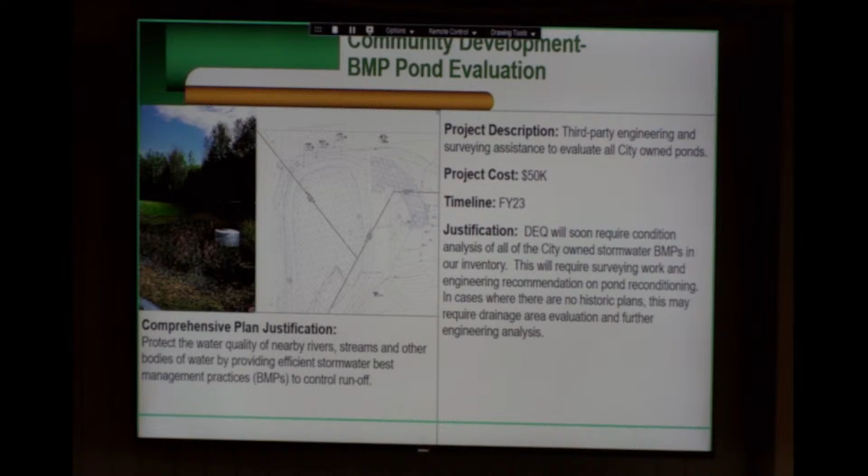Any questions? I have one. All the way back to your property demolition—so far you've been able to do it in-house?

No, we were able to take down one house using staff resources. It was not our preferred method, but we actually had a substantial collapse overnight as we already had bids in hand. We were simply waiting to vet those bids and release a contract. Then we had a substantial partial collapse of that structure that opened up the interior to the front yard. We had to deal with it quickly. In-house resources was the most efficient and quickest way to get it taken care of.

However, the last one we did, we were able to actually get the contractor on. So you outsourced? Yeah, okay. But not actually RFPs—these were not $100,000, $200,000 plus jobs, but requests for quotations were issued. So the last one was done using a third party.

Well, when you only have 25,000—does it ever come in more than that? How do we fund it if it comes out more than that? We're using 25,000 because that's a base—that's what's slightly more than the last contract we executed. And that house had a basement, so there was an aspect of fill and regrading that went along with that.